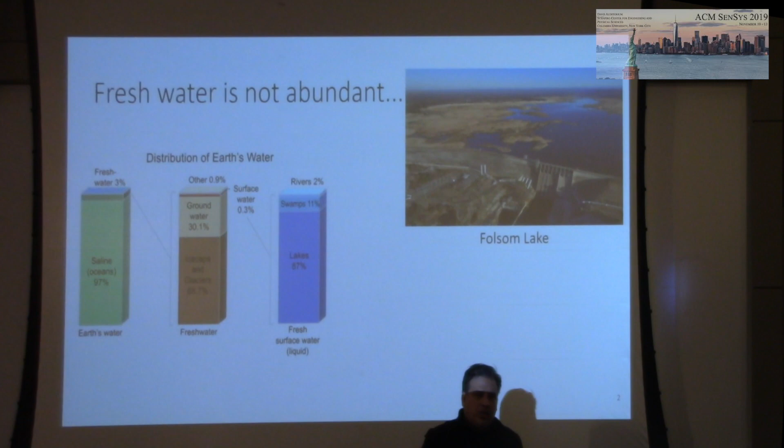So I don't know if you know, but fresh water is not an abundant resource. Only 3% of total water resources are essentially fresh water, and 2/3 of that are in the ice caps, Antarctica and the Arctic. So it's only 1% that we essentially use for consumption and also irrigation. And as you can see, particularly in California, but all over the US, probably all over the planet, droughts are a big issue and a big problem that affect crop yields and affect a lot of things.

Specifically with respect to land coverage, turf is not a very well-known crop. But if you actually go to the USDA, it's the largest crop in terms of surface in the United States, 128,000 square kilometers. It's actually 3 times the size of corn, which is the largest crop in the US.

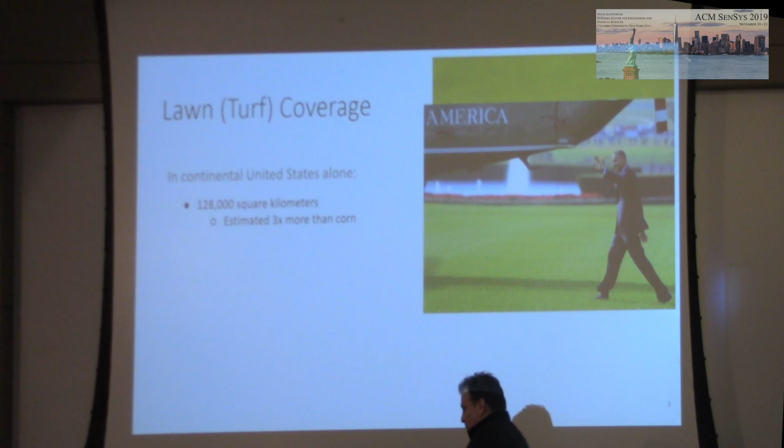But we also use lawns for aesthetic reasons. We like to walk on it, important people also like lawns. We love to interact, to sit on this, and we live in places that are full of landscaping. You can argue it's cultural reasons and we may change the culture, but the reality is that's what we have. And it takes a lot of water to irrigate all this area - in the order of 9 billion gallons per day. That's roughly 2 to 3 hours of Niagara Falls constantly just to irrigate our lawns. Just to give you a perspective that this is a big problem.

Right now, we are doing a horrendous job at irrigating a very large surface area. The majority of the problems are places that are under-irrigated, which leads to really bad quality of service in terms of the aesthetics of it - the plants suffer. And also over-irrigating, which is actually a more drastic problem. It leads to bad efficiency and use of the scarce resource, erodes the soil, and also leaches fertilizer and chemicals into the substrate of different aquifers that are underneath.

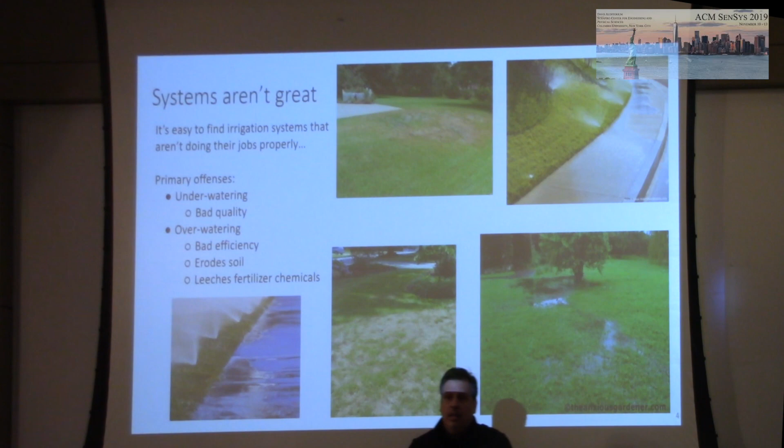So we wanted to do a better job and try to solve that problem. We took a look at the architecture of most irrigation systems at residential and even larger sources like stadiums, universities, golf courses, etc. Most of these systems are actually controlled by a valve that activates the water and activates a line of sprinkler heads that are all irrigated together. So the problem with this type of system is how you actually do control.

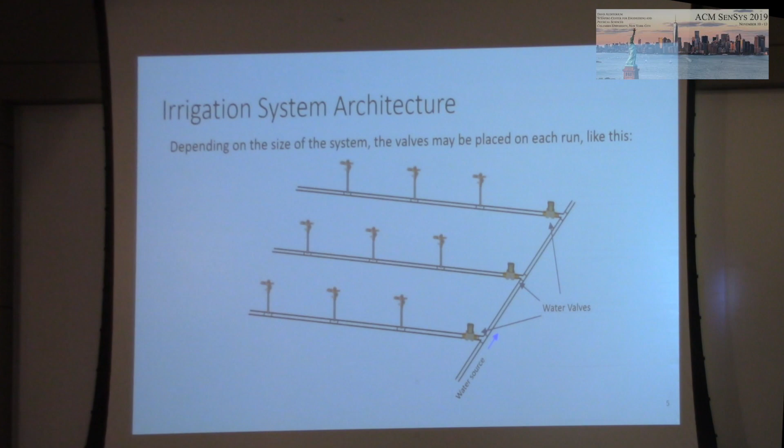Most of this is manually done. State-of-the-art industry systems use what I call ET, evapotranspiration systems that are connected to a weather station, and then try to assume that you're going to provide enough amount of water for all the water that's lost due to weather. But the problem is that in most of these irrigation systems, the area that you're irrigating is not homogeneous. So what you really need - for instance, in this case, because of elevation differences, because of different depth of the soil, because of different type of soil, because of multiple reasons, because of shadowing in a particular part of the area - you need to have enough granularity to irrigate differently.

So in most of these systems, we end up with a trade-off solution in which, because of one sprinkler or a group of sprinklers, you need to irrigate more. All the sprinklers in the line, because you have only one valve and actuation control, need to over-irrigate. So this is the problem. It's not like people are morons - it's just that you don't have enough granularity of actuation.

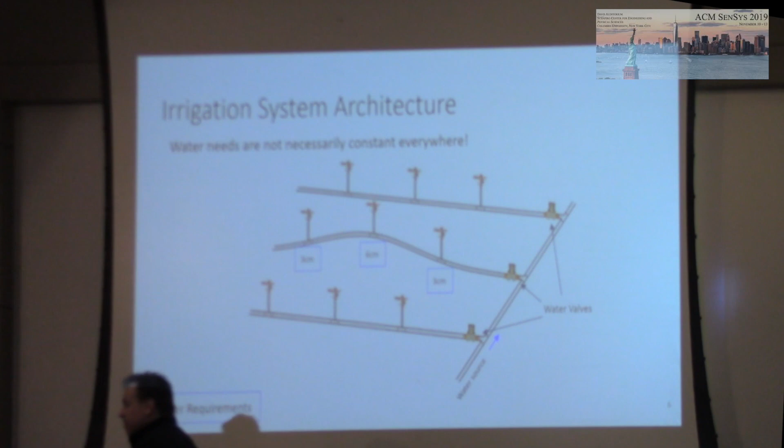So over the past years, we have worked on this issue, and we have essentially gone into distributed actuation and centralized control. We have replaced the single valve or multiple valves line by a valve per sprinkler head. And we're going to put intelligence in each sprinkler head, in which we're going to put a mote, we're going to put a solenoid, and we can choke the water or not. And we're also going to measure the soil moisture in the soil. So each sprinkler has a node with solenoid on-off control, a moisture sensor, and a radio. And they're going to transmit all these values into a centralized controller.

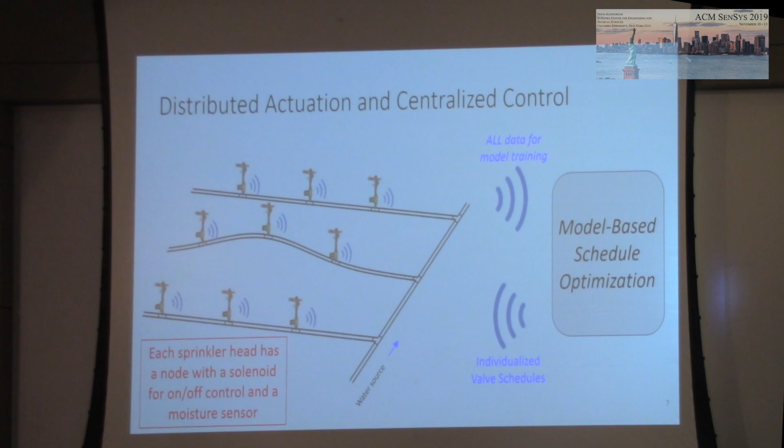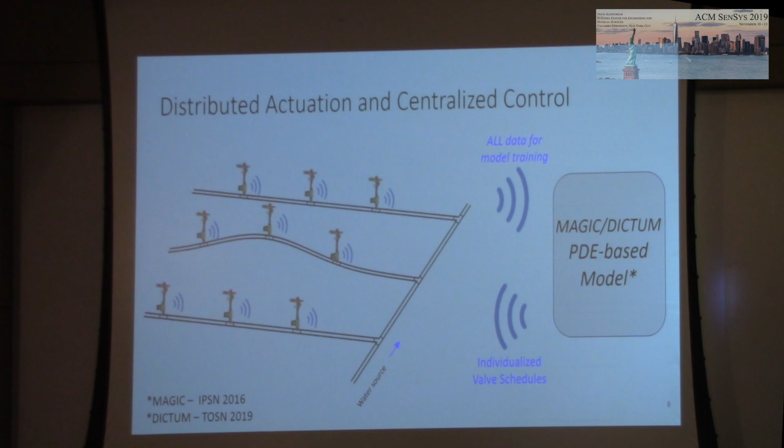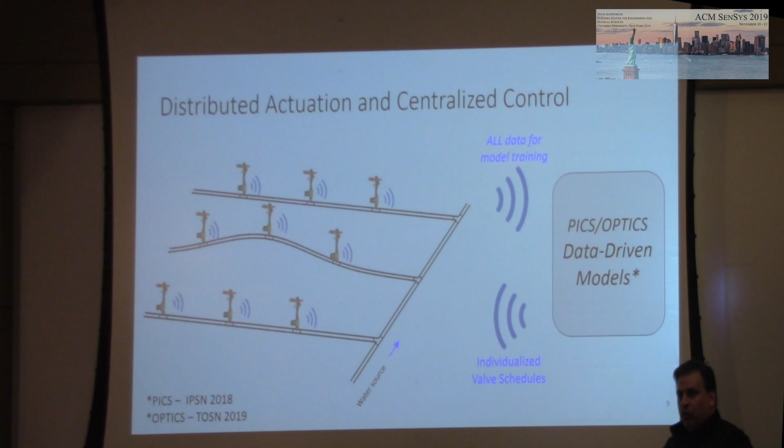And then we have also gone into, instead of first principle models based on partial differential equations, a pure data-driven approach. Based on the information we provide from the sensors, we build data-driven models directly from the data. And we have been successful in doing that.

In the last piece of work I presented last year, there was an issue we actually put in the paper, which was that one of the centralized controllers one day broke. Broke in the sense that it's not that it ran out of power, etc. There was a very critical problem in the serial communication between the modem attached to the Raspberry Pi acting as a controller that essentially prevented commands from going out.

That led to an increase in water consumption one day, because we want to continue doing research, we put fail-safes in the devices so that if you're in constant irrigation for more than 2 hours, something is wrong and we need to cut off the flow of water no matter what. So the system actually recovered nicely. It over-irrigated one day, but then the next day you see it under-irrigated because it could measure and react to that condition. It's like reacting to rain.

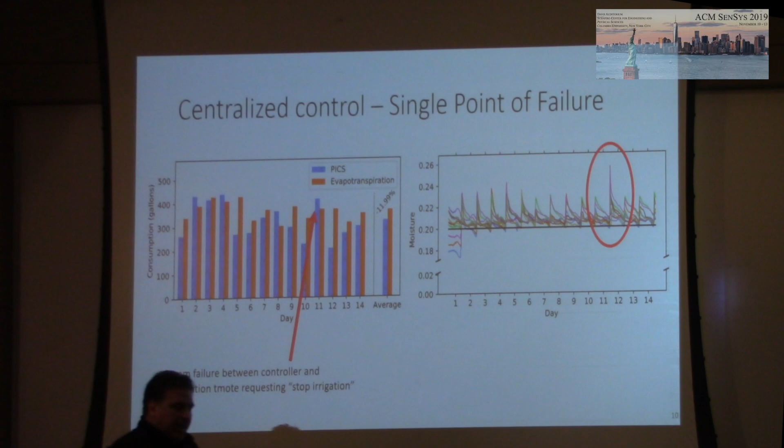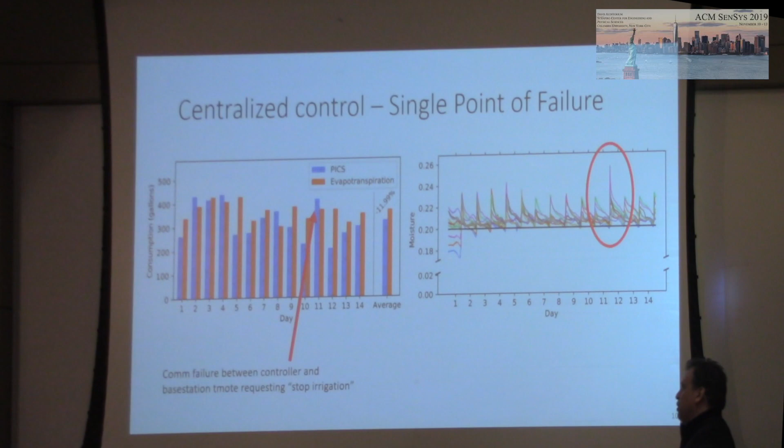But that was something in the back of my mind, that the reliability of this device was not that great. We thought, okay, we can over-engineer the device, perhaps change the chips, the serial communicator, shield these things in order to deal with the environmental conditions we face. So the first thing we thought is, classic solution when you have a single point of failure, you just add redundancy. So we added more controllers.

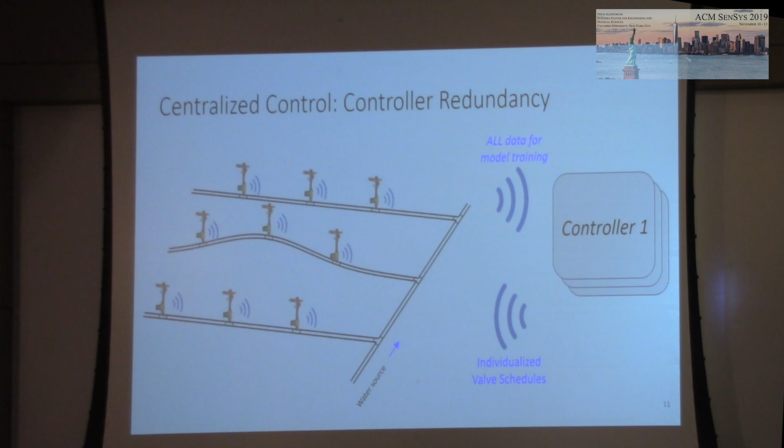We ran the experiments on certain days, all of them failed. It's like, oh my God, we are in trouble here. So we kept adding more and more controllers, but they all kept failing. So we analyzed the problem, and it was essentially correlated failure due to environmental conditions. There were certain temperatures, certain humidity levels, certain days that led to all these devices failing in cascade.

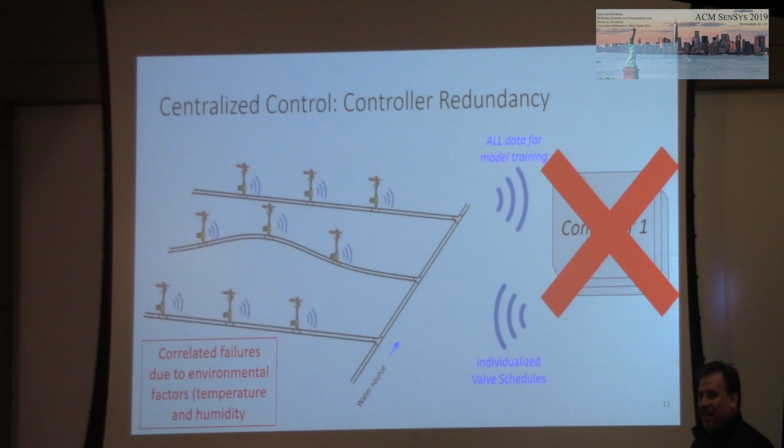So we thought, okay, classic solutions do not work. We have to think completely outside the box, about how do we actually make the whole system more reliable. There were other problems with centralized control. The entire traffic has to go to a central place constantly, to provide enough information such that the central optimizer controller could provide information back. When we increase the scale of the system, that becomes an issue.

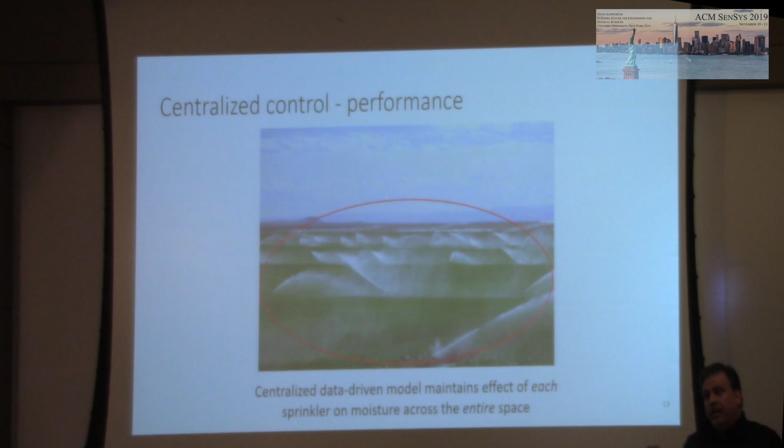The other issue, though, is that these model-based approaches use all the information from the entire field. On a large field, that's a lot. So, computationally speaking, we were getting to the limit of solving this optimization problem no matter what type of model we were using, in terms of scalability and the total number of sprinklers we could use.

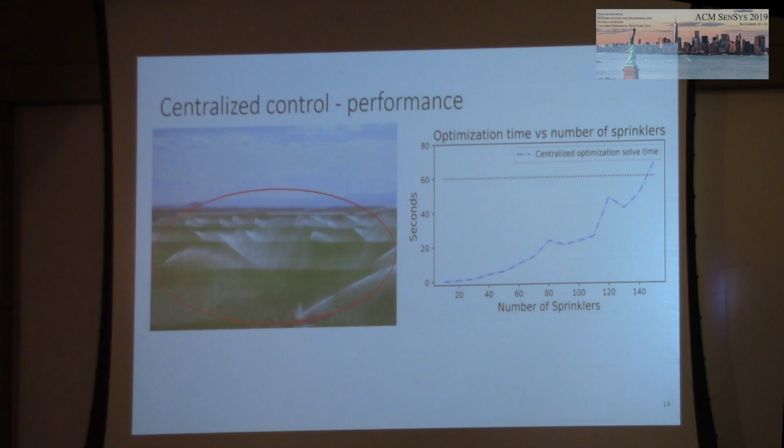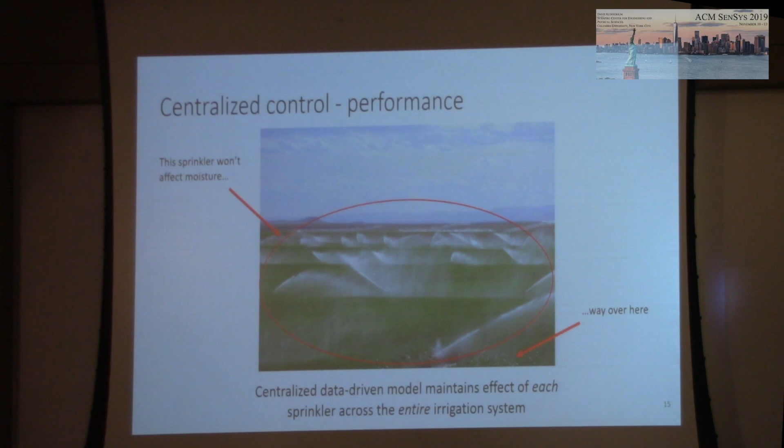So we decided to take a completely different approach. Instead of living with the limitation computationally, limitation in terms of reliability, a single point of failure, etc., we decided, why don't we take a completely different approach, and instead of trying to maintain the state for the entire field with a single controller, we go fully into a completely distributed version.

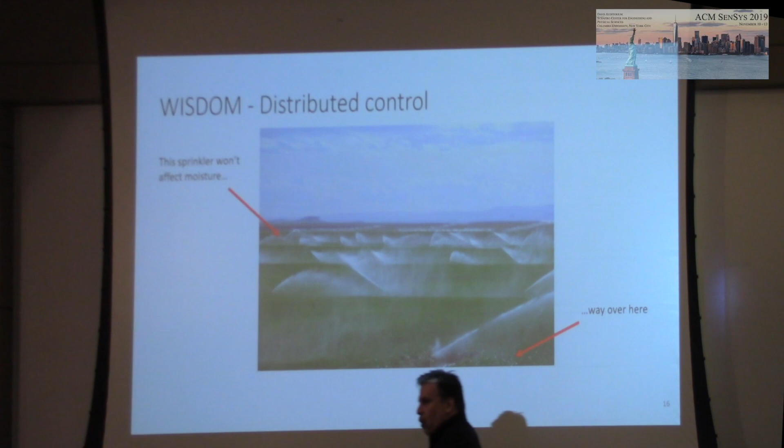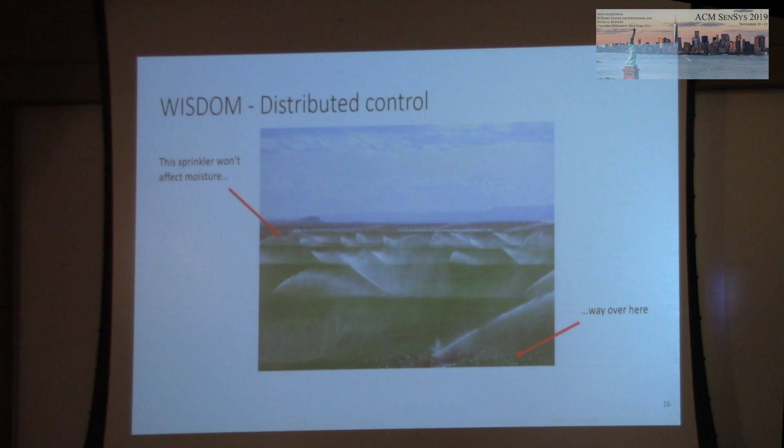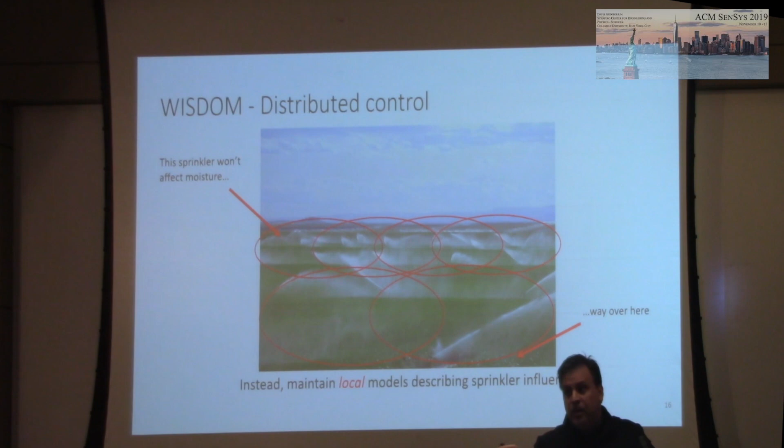So that is essentially a key insight, that you have a natural partition in the environment, and you can essentially partition the space. So instead, we decided we're going to build local models that are only affected by local irrigation and my neighbors. That means I'm going to have each controller on each sprinkler head, and I'm going to only use local information that I measure myself and only from my directly connected neighbors.

But that led to another problem. We decided, okay, what do we need to do in order to now move the centralized controller that is nicely written in an optimization language in Julia, with a nice operating system, with power resources, etc., to now use the battery-operated nodes that are in each sprinkler.

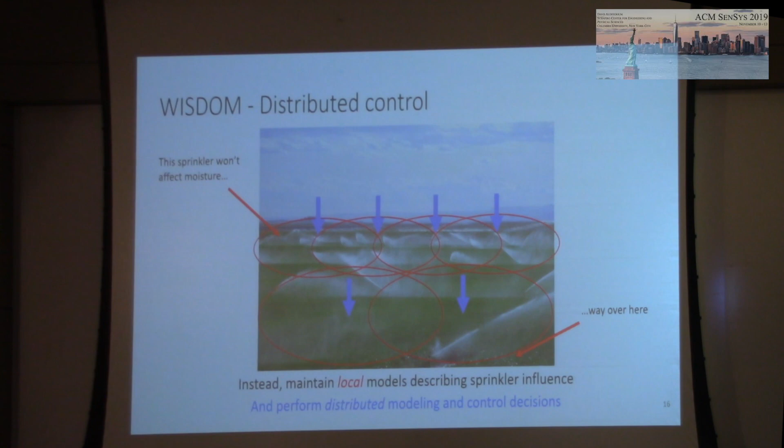And this is a nice idea. It solves all this problem, but you still have to deal with the issue of how do we actually do the optimization on the nodes, which is kind of a complex task.

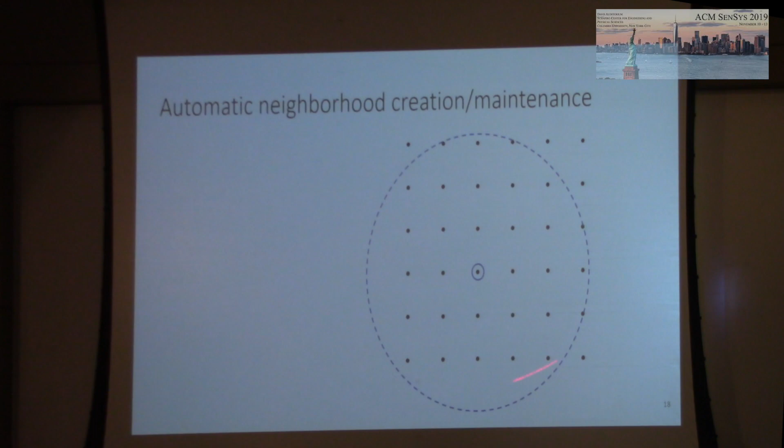The first thing we faced was, how do we partition them? Naturally, we were lucky, the sprinkler heads' radius of action was essentially limited, and it was smaller than the radio communications we were getting. So by simply detecting and doing running neighbor discovery, we could determine what is my local field of action.

It was a natural way to partition the system. The other issue, though, is that we still need to go and do an optimization within each node.

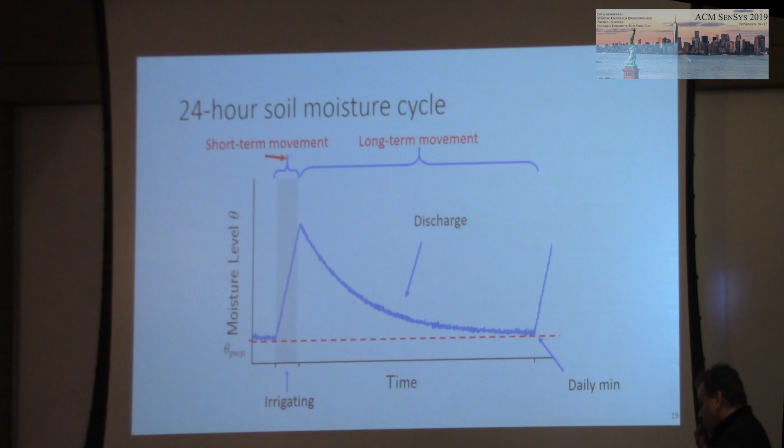So you have the discharge, you have the daily minimum, and you can naturally partition the problem into a short-term model, which essentially deals with what is the movement of water and how the water will move to reach a particular state, and then the long-term movement. Once you reach there, just by the losses within the field and the movement of water, together with weather data and the minimum, you can essentially expect what will be.

So, the long-term model can be easily done with a data-driven approach. You are gathering data over the entire scheme, so you can essentially fit any curve that you want. In general, we fit a simple model with a simple regression based on past information. The cool thing is that spatially, in different parts of the field, the curve is not going to be uniform and look the same. Different areas have different characteristics, but you can fit based on what you're using.

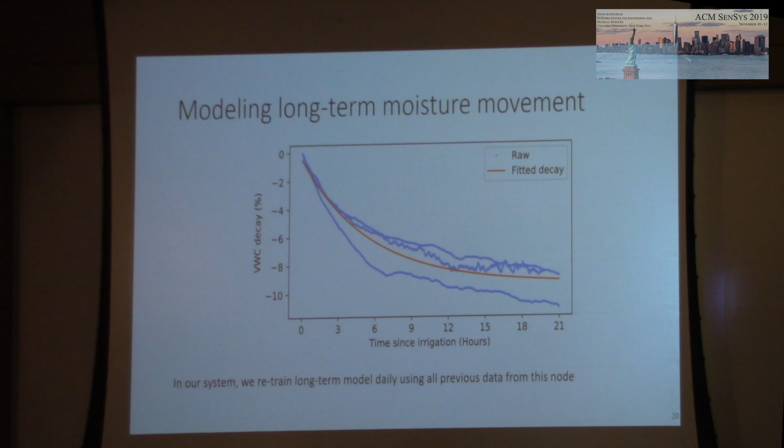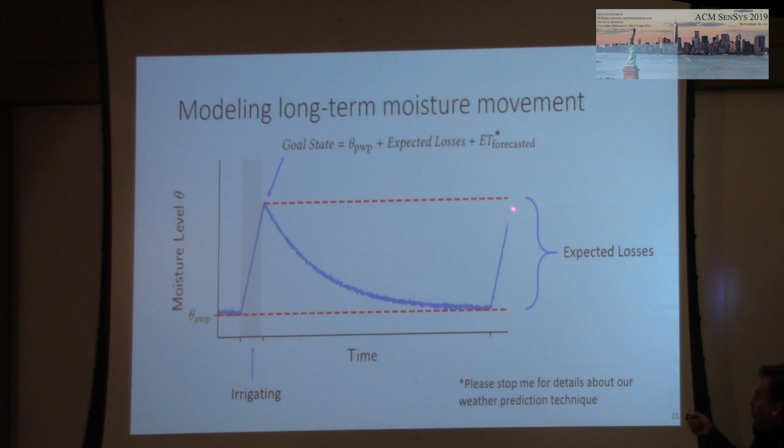So the next step is how do you go and train a short-term model, which is, while you're irrigating, how is the water movement model? And for that, we also use the data-driven approach.

Essentially we find the linear regression that tries to satisfy the following: given the current state of water moisture, this is all in vectorial form, and given the sequences of activation of the different sprinkler heads within the space, what would be the expected water moisture at the next time step? In our experiments, that time step was essentially 1 minute. So you can get this information directly from the data that you measure.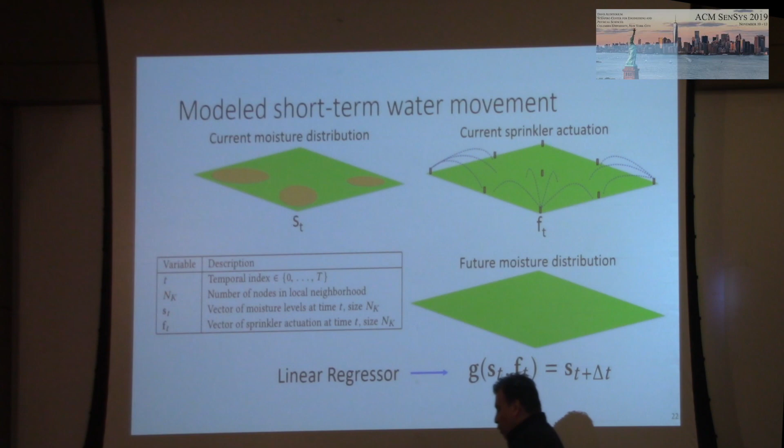At the beginning, we bootstrap the mechanism by activating the sprinkler heads one at a time, so we have a seed for the model when we have no information. And as the day passes by, the model converges quite fast.

So all this is to solve this problem. This is the optimization problem you're about to solve: you're solving the minimization of water use subject to a bunch of constraints. It sounds complicated, but it's not.

First, we have a physical solenoid constraint, which is we either activate water or not. We make it a continuous variable, even though it's a binary variable, because it simplifies solving the problem instead of as an ILP. It's a linear programming problem, so it simplifies things. There are more details here; I'll be glad to take it offline. This assumption actually does not hurt the performance of the system.

We also know that the water content should never be lower than the PWP at any point in time, because that's important—otherwise the plant health will suffer.

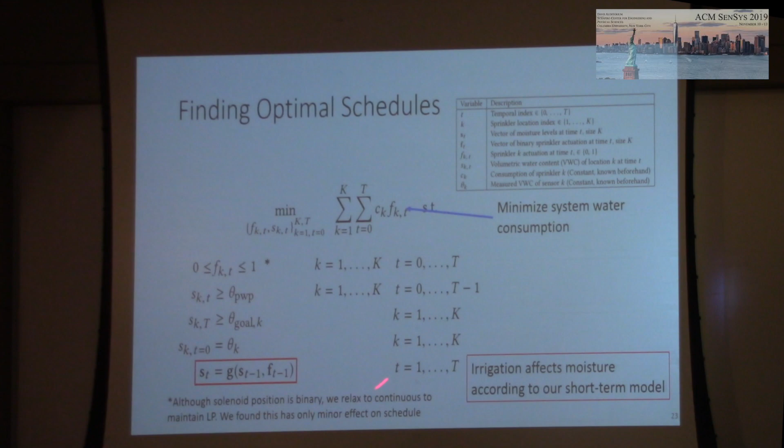And we also want to achieve a particular goal at the end of the irrigation cycle, so that if we go with the losses, we're never going to exceed the minimum. We know the initial conditions at the beginning of the irrigation cycle because that's something the sensor provides to us. And finally, we have built a short-term irrigation model that deals with how the water is going to move in the short term while you're irrigating.

So given that, we want to go into a completely distributed pipeline. We have now localized models that are only using information from local neighbors, and we want to run the optimization. But the size of my neighborhood is significantly smaller than the total number of nodes in the system, which computationally helps us deal with this issue.

Still, we have the issue that we need to run an optimizer doing all this and solving an LP problem in the moment. That was still challenging, but we thought this was the right way to do it. But we still have to solve this issue, so we tried to do it.

We have run even machine learning in previous experiments, in previous papers, we already knew about this initially. We have done logistic regression, we have done stochastic gradient descent. We thought we could do it. Too difficult - to the point that the optimization matrices couldn't even fit in memory for the problem, even using the local memory. So we were going nowhere. Plus porting all the libraries into TinyOS with no floating point, doing all these numerical tricks, was too much work.

So we took a look at how do we actually solve this problem, and we thought, okay, we can have a Raspberry Pi Zero, which provides a 1 gigahertz processor, has plenty of memory, runs Linux - we can essentially directly port into this, it works fantastically with minimum effort, but it consumes a lot of energy, has no radio, very high power.

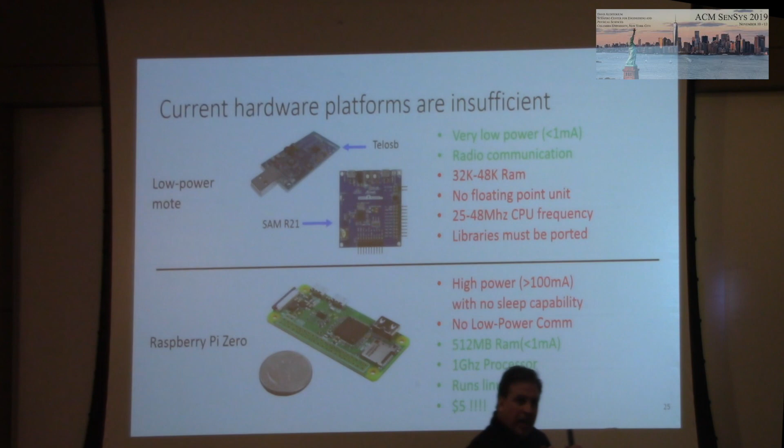So then came the idea - well, we need to combine the two features together. And that's what we did. We provided a co-processor hardware architecture in which the master is the one controlling the radio, doing all the sensing, doing all the communication between neighbors, and only when it needs to solve the optimization problem and the control problem, it activates the Raspberry Pi that is co-located, which provides the substantial data storage you need and also performs all the intensive computation in your application.

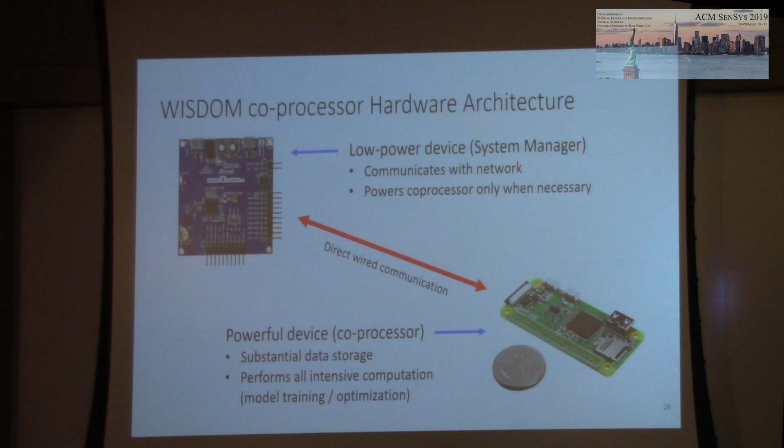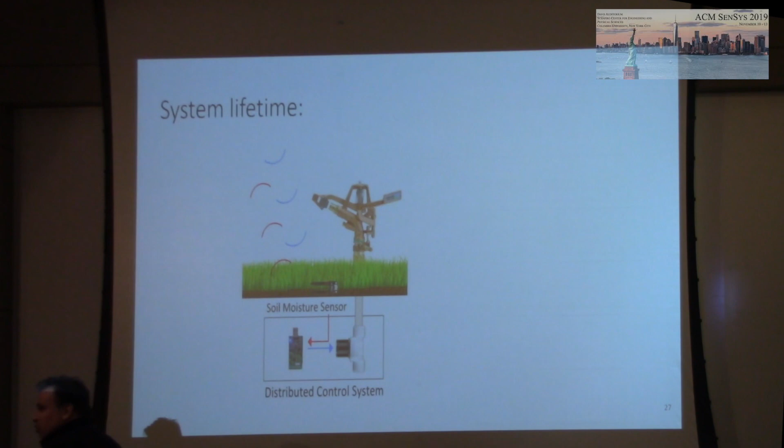Well, we thought this is another application, we could probably take advantage of some renewables. But then we tried solar, and it was impractical because people need to essentially cut the grass, mow the lawn. So what do you do? We cannot have things sticking out.

We tried also temperature differential based on depth, trying to scavenge energy from there. It didn't work out - there was not enough delta T there, delta T in terms of delta temperature. But we thought, okay, we're morons - we have a lot of energy in the control we're doing, which is the movement of water. That provides a lot of energy. So why don't we stick in and do energy harvesting with a micro-hydro water turbine?

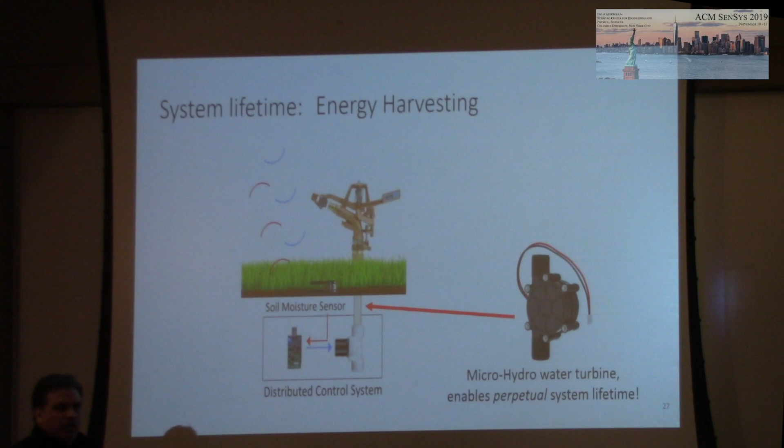While we're irrigating, we're constantly scavenging energy that we can store to run all the electronics on it.

So the contributions of this work are essentially the distributed control aspect, local modeling and optimization of the end devices at each sprinkler head, the data communication only required to neighbors, and the new co-processor architecture to facilitate distributed computation. And we also introduce energy harvesting, which allows essentially perpetual lifetime of the system.

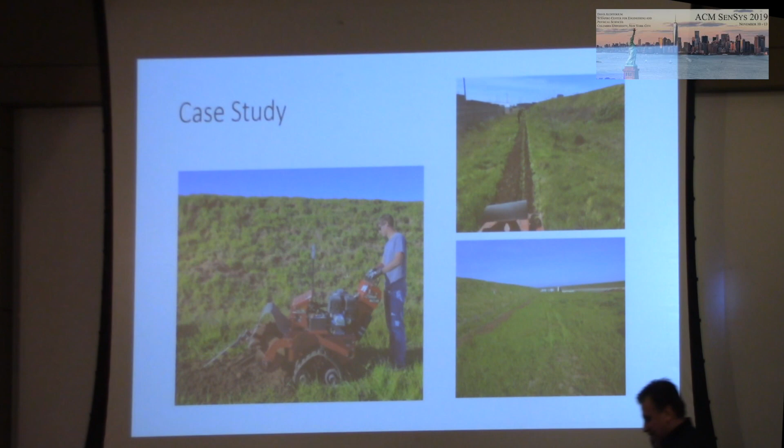That was a lot of work, mostly by Daniel. You see me here and there, trying to help him with some installation. So we needed to do a full test bed - doing the trenches, putting in the PVC pipes, 300 psi, everything sealed, everything correctly installed. Otherwise the university will come down on there and will never allow me to do any sort of experimentation again on the field.

And we deployed a test bed in an area where we can test multiple different systems side by side, in almost identical conditions, or as close as possible. So what we did is test our WISDOM system against the state-of-the-art industry standard, which is the evapotranspiration system, and also the PICS control system, which I presented in a previous year - that was essentially a centralized control.

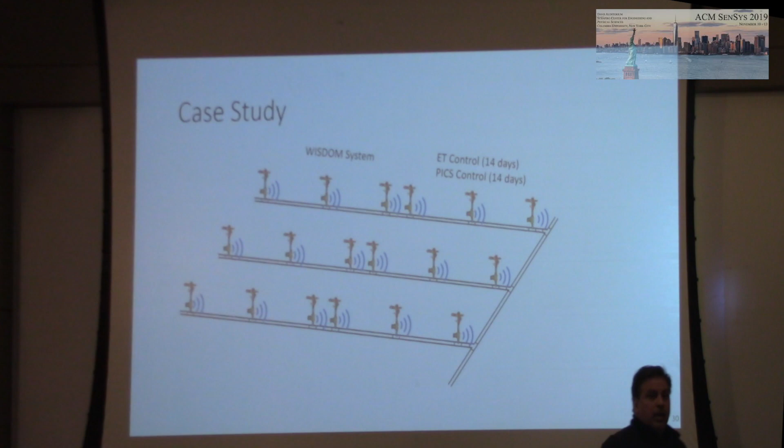And these are some of the results. When we compare side by side, the first thing you notice is the ET system really, because it doesn't know the initial conditions at any part of the field, is trying to replenish the losses that you see based on weather. It tried to do a relatively good job at that, but because it might be far off from the essentially minimum water requirements that are necessary, and because it's blind with respect to that, it just cannot do a better job.

In Wisdom, the initial conditions you see here were highly irregular in certain parts of the field. There were activations of the sprinklers daily, but some sprinklers were not activated and were decaying until you actually reach the minimum that is necessary. Otherwise, why waste water?

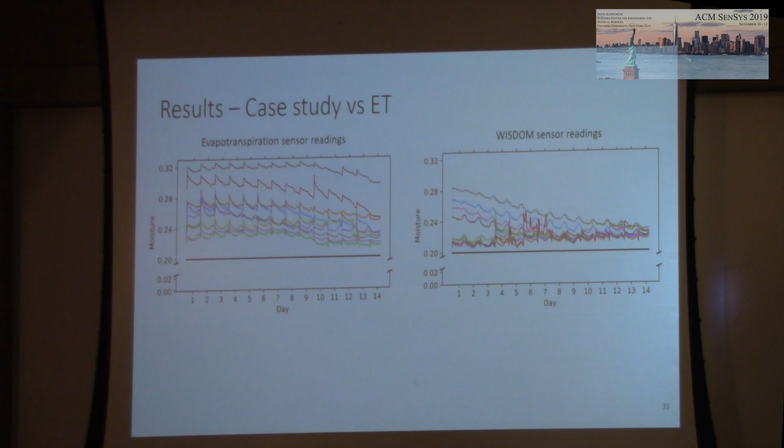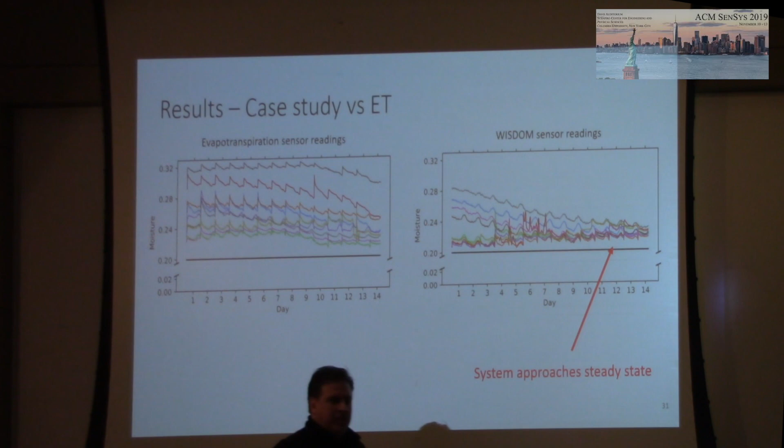So these are the initial conditions, and this is essentially probably a more accurate picture of what is the expected steady state performance of the system. The overall numbers over the 2 weeks that we tested the system side by side are there. We have an impressive 61% water savings, but that's kind of a misleading number. In our paper, we try to emphasize that the steady state result is probably the more important one, which is completely independent of the initial conditions.

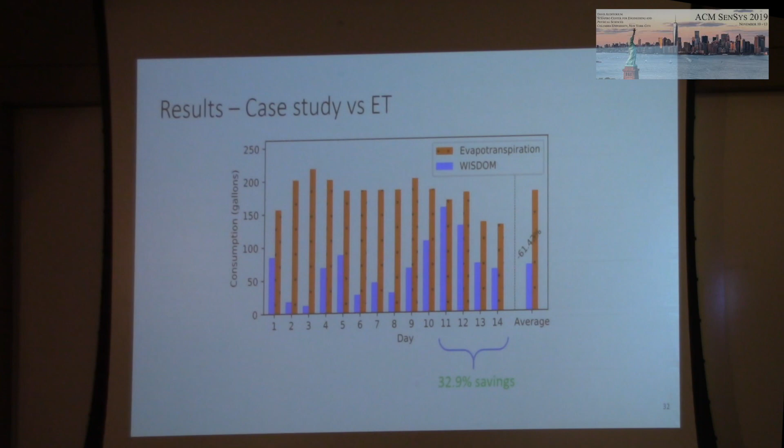Then we compare this with the state-of-the-art academic work, which was PICS, with the centralized controller, also with the data-driven model. You see here also the wildly oscillating initial conditions. It rained before the experiment, so you had to wait a long time until everything dries out, but it's never perfect. So we start the experiment, and we got some results.

And we also see a heavy leaning towards Wisdom in comparison to PICS. But again, this is a misleading number. You should expect the performance of both systems to be the same. The only thing that we're doing is we have a centralized solution versus a distributed one. But if you look at the last days, they get within 4% of each other, which is the result that you expect. They're using almost the same amount, so both systems should be roughly the same.

So we wanted to essentially also test what are the limits with respect to a local model, building an optimization model versus having a global model that should be optimal, and whether that would reduce the quality of the solution in terms of irrigation. We tried this by essentially going into simulation since we didn't have a large enough field to do it. For that, we used a physics first-principle model based on partial differential equations in order to essentially test the short-term irrigation model as a ground truth on the simulator, and then use the PICS long-term model between irrigation cycles. We tested a different type of flat land, a sloped land, normal soil, clay soil, and also these very artificial 2.5 range sprinklers.

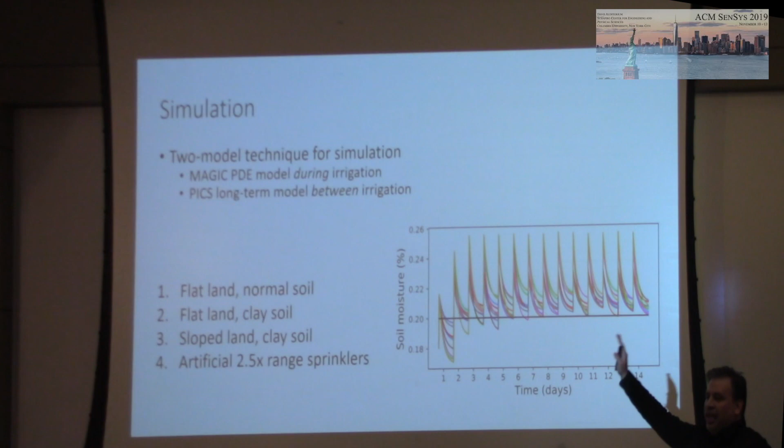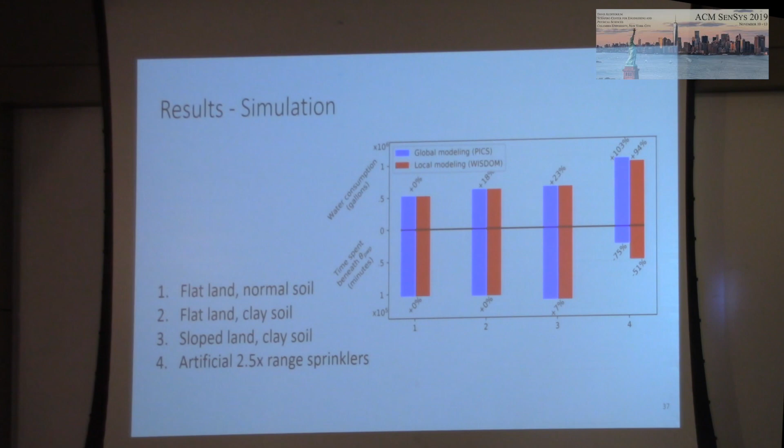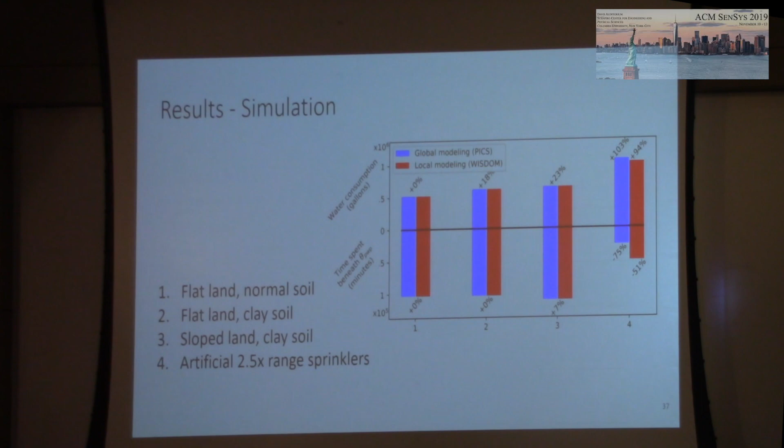Sprinklers in general have to have a distance between 50 and 75% of each other in terms of where the water reaches. But we purposely went to extremely wide ranges in which a single sprinkler would cover an area 2.5 times the distribution of the other sprinkler on purpose. We see that there was essentially almost no difference between the two, except for this very corner case at the end, where the difference happens. So if you have an extremely bad setup of sprinkler heads, where the range of the sprinkler head is much larger than the distribution of sprinkler heads in the system—which no landscape person would essentially deploy that way—then you start noticing the difference.

So all in all, we try to provide all the quality of service and efficiencies that we have seen in previous work with respect to PICS. We have a distributed system that removes the limitation of the previous work in terms of single point of failure, computational limitations, and also a decrease in overall communication overhead. Energy harvesting allows perpetual system lifetime, and we have a flexible new hardware platform that enables in-network processing.

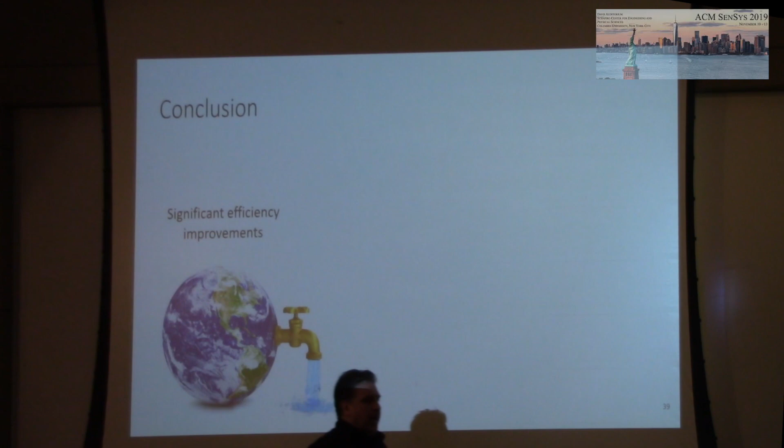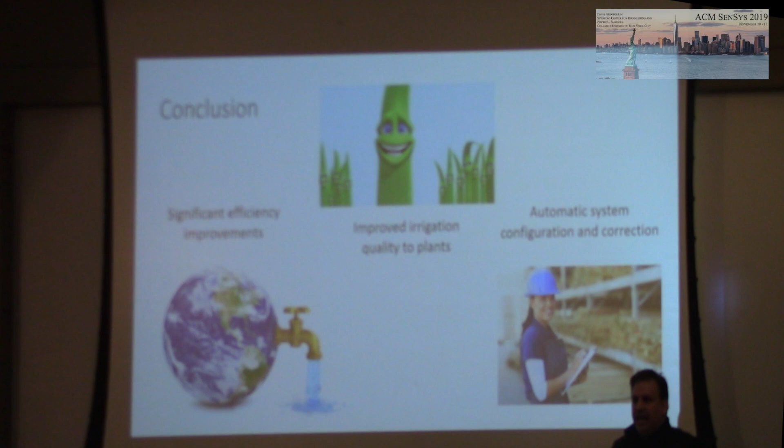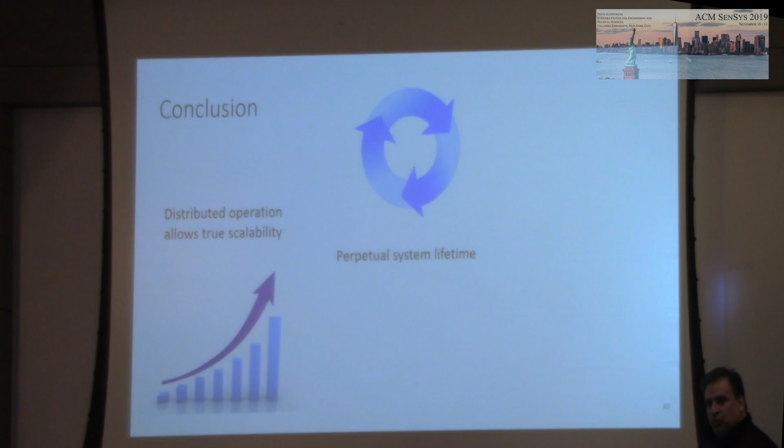So we started by wanting to have something like significant efficiency improvements, improved irrigation quality of the plants, automatic system configuration such that the person deploying the system doesn't have to train or program anything. The system will run itself under all conditions and adapt. Distributed operation that allows true scalability. Perpetual system lifetime, no battery changes—once deployed, the system will continue running. And it's actually usable to control real irrigation systems. Thank you.